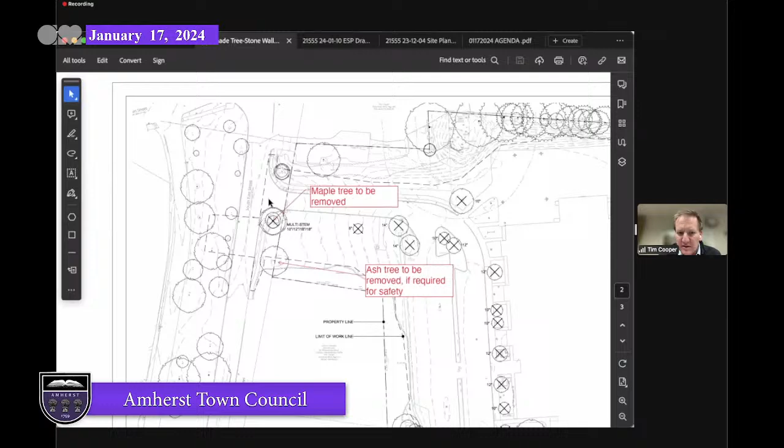We are going to zoom in around this exit with the two trees that are just to the south of the exit, south of the Main Street, South East Street intersection. So the intersection would be just where my cursor is, and this is the egress from the school. I can zoom out a little bit for context.

So the maple in question is just south of the existing drive, and then the ash is at the corner of the site. As part of the overall main project, this drive will be converted to an entrance and egress for staff and parent vehicles, with 3 lanes. It will be widened and moved to the south, away from the intersection at Main and Southeast Street.

That movement will move it into this maple tree. That movement is basically to mitigate the traffic concerns with the queue at that intersection, so we would like to move that entrance down to give a little more space. That is why that tree is slated to be removed with the current design.

The proximity to the ash tree, and the condition of the ash tree and sight lines, which we have to get out there and look at, may require that that ash tree be removed too. But that is why we have made the application for both of those trees to be potentially removed. The maple tree with the current design definitely has to be removed.

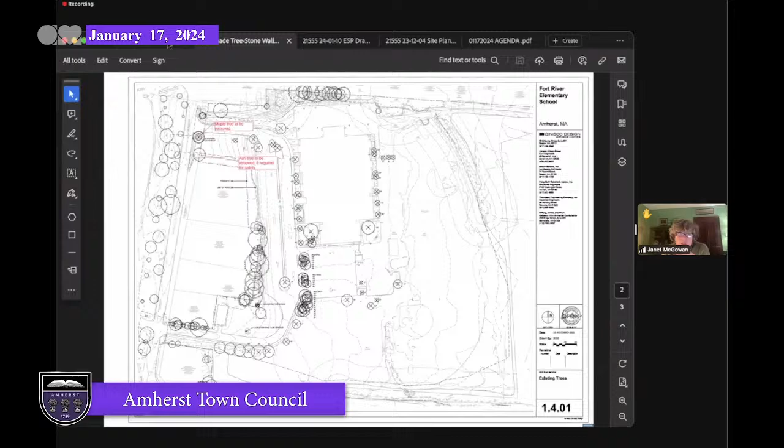So I went and looked at the trees. The maple is clearly, if you widen that exit or entrance in any way, definitely the maple tree would come out. It wasn't clear to me from the map the location of the other tree. I didn't know where that tree was vis-a-vis the new road. So I wondered if it could be saved, but I didn't have any maps to say.

Excuse me with this cat, I'm sorry. So I wasn't sure it had to be removed because I wasn't really sure where the road was going to be. I couldn't find a map that really showed that clearly. I just had two small maps in my packet.

Okay, all right. And it sounds like Mr. Cooper isn't even sure that the ash will be affected or not at the moment.

If I may respond to that. So the drive moved to the south, the curb line is right at the canopy edge. So depending on the health of the tree, it could very well survive. But for the sake of safety, we would absolutely want to make sure that everything was healthy, not obstructing any views, before the decision was made to keep it.

The view on the screen now shows the drive in the final position, which is widened to 3 lanes, so 2 can exit and 1 would come in. And the northernmost lane in the new position would be right in the stem of the existing maple tree. So that's why that would want to go.

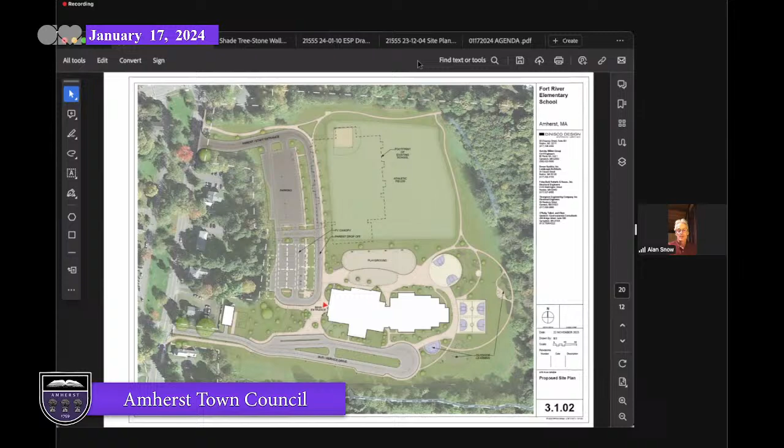Okay, I'd like to follow up on a couple thoughts that came to mind over the tree itself - this is the ash tree. Unless the town wants to put in funding to inject the tree to preserve it from emerald ash borer, it will die eventually. The tree is surrounded by probably half a dozen other large ash trees that are well in decline and dying from emerald ash borer. So it's just a matter of a couple of years before that tree is in decline.

As far as the tree hearing goes, it's a healthy tree now, so we need a tree hearing for it. In 2 more years, I would probably be cutting it down because it's falling apart over the public way. So I did meet with the Public Shade Tree Committee, we did discuss it.

I was told essentially that there are 2 phases to this project: there's the temporary driveway fix, which is going to be all traffic coming in and out of the northernmost exit - so buses and non-school vehicles, parents, etc., pulling into the school. And the southern entrance is going to become the construction entrance. So for a period of probably 2 years, this area is going to be used to get in and out of the school for day-to-day operations.

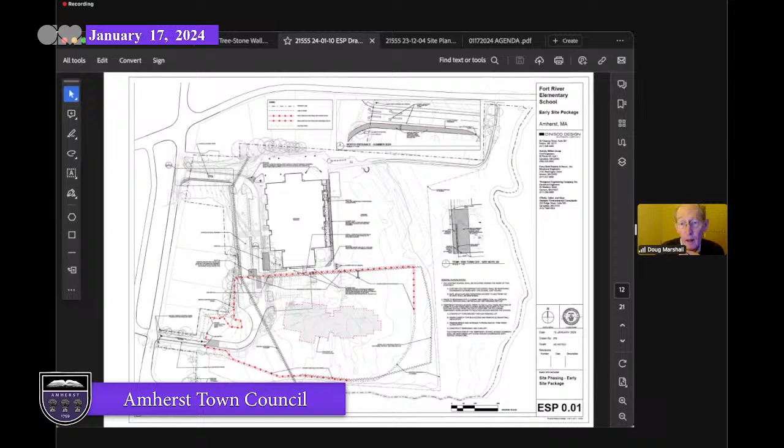Right. And I assume there's not enough frontage on this site to move the driveway entirely past the maple to the south. Is that right? Correct. Okay.

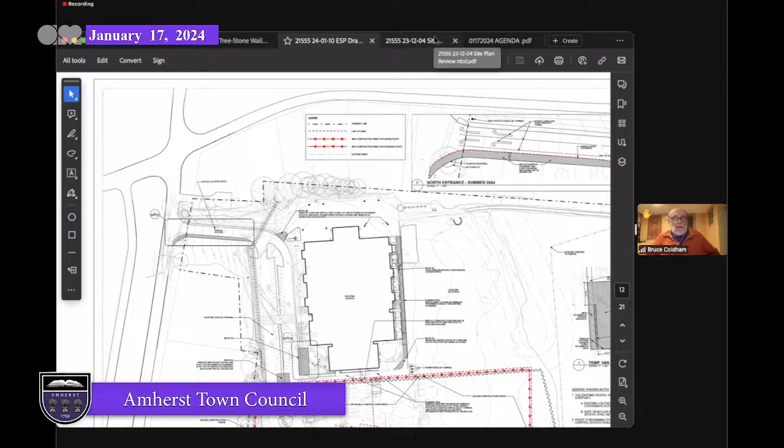For the record, I guess I should say that although I'm not a member of the elementary school building committee, I have attended all but probably 3 or 4 of the meetings they've had in the past 3 years, so I'm rather familiar with the project. I do remember many of the conversations, particularly around site selection, whether we would have the Wildwood site or the Fort River site. One of the principal concerns against the Fort River site was the problems of traffic management in and out of the site. And if Rupert Roy Clark, the maintenance department superintendent of the schools, were here, he would express a very strong concern about trying to mitigate, which is what the design team are doing here.

So it's a serious problem that is trying to be solved here, and it seems the best solution is to move that driveway. I'm representing, I think, not just my own view, but some of the other folks on the other committees who have been chiming in on this. Also my personal opinion, as I saw that tree, it's a multi-stem tree. It may be healthy, but it's not particularly attractive. Under the circumstances, I would strongly support the removal of that tree and planting another one that can grow and eventually look a lot nicer than that multi-stem fellow currently there.

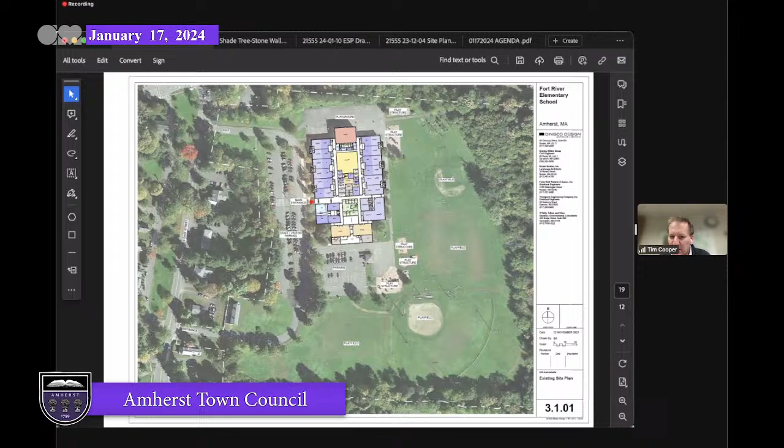There is some compensatory storage, some minor regrading as the floodplain extends onto the site, and we will be manipulating the ground within that, but the building itself is outside of it.

Moving to the proposed site plan, we have separated the vehicle traffic on site in the proposed plan. Parking for staff and parents will all enter and exit through the north entrance, which will be widened to 3 lanes.

For parent drop-off, parents will come in, circulate through the lot, and drop off at the west end of the building. Traffic for that drop-off pattern will be going through the parking lot, but teachers will be in before drop-off and they will be leaving before, so there will not be active parking during that. All of which is to say there will still be staff control of the drop-off situation as there is now.

The southern entrance to the site will be dedicated to buses, service, and vans. They will all loop through down here and be able to discharge students to either the door at the center of the building or the main entrance, depending on how staff wants to bring students into the building.

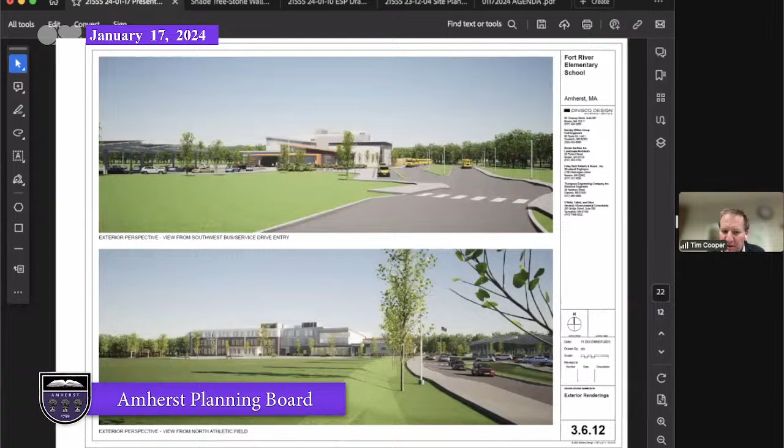The view on the bottom half of the page is looking from the north as you would be leaving in the parent drop-off drive, looking at the building, and you can see the 3-story classroom behind the library and cafeteria.

That is, those are the plans and the views of the building. I don't know how much else you would like to get into, but we have utility plans, we have lighting plans. We can also open up to questions. I don't know how you would like to proceed. That is the overall of the project and the benefits that we see from it.

Okay. Thank you, Tim. I'm sure we'll come up with a few questions for you to show us a little more of the design before we're done. All right, so...

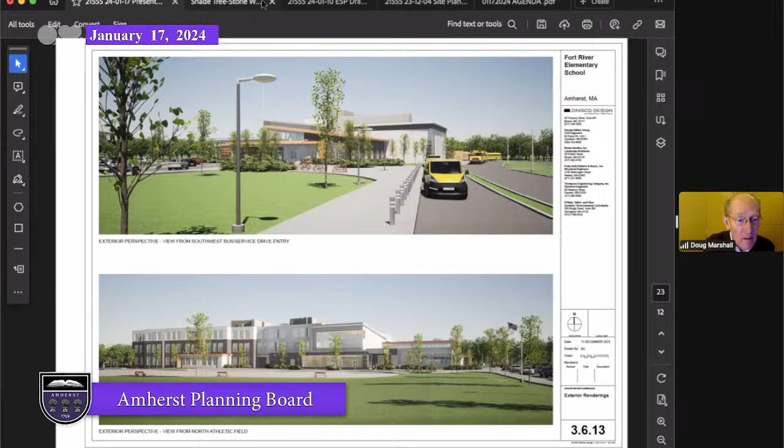I guess you mentioned the solar panels going 15 feet, going into the 30-foot required setback, and I didn't remember hearing that before. Chris, do we have a complete list of the waivers?

That particular item is not a waiver, it's a special permit, and it is mentioned a couple of times. I think one is on page 2 of the development application report, where the side setback is mentioned, and the side setback normally in this district is 15 feet, but because this is an educational use, the setback needs to be 30 feet.

And the setback for the solar canopy that's proposed appears to me to be 5 feet in one location and 10 feet - 5 feet for the canopy and 10 feet for the post. Now, it is possible to have a special permit to modify that setback requirement.

And at the bottom of page 2 is a description of the footnote A special permit that the applicant may choose to take advantage of. So the applicant has a couple of different choices here. The applicant could pull back from the property line 30 feet and then meet the zoning dimensional requirements, or the applicant could apply for a special permit to modify that setback requirement and then choose how much he wants to modify it. And it's kind of a trade-off between having more solar canopy available or less solar canopy available.

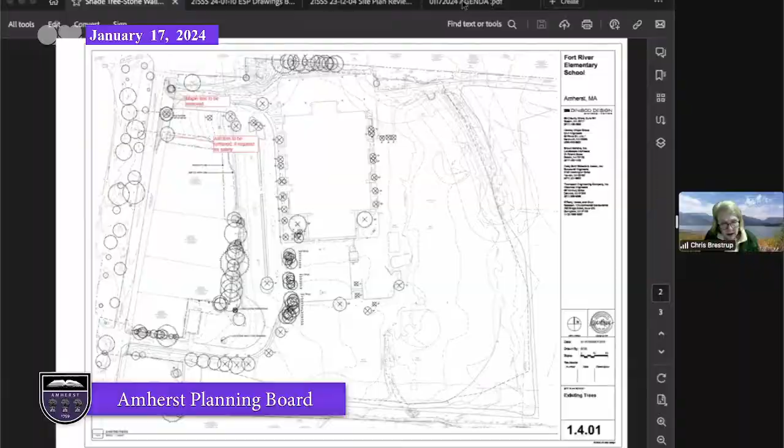But if not, it would probably be sometime in early February that this would be heard by the Zoning Board of Appeals. So I think that is the extent of the special permits, which would be, in the end, three from the planning board: a special permit for the height, a special permit for filling, and a special permit for the side setback for the solar canopy. The one you have not received yet is the side setback for the solar canopy, so Mr. Cooper will be submitting that unless the applicant decides to pull back and not put the solar canopy so close to the property line.

Thank you for running through all that, Chris. That is helpful to hear it.

Janet, I have seen your hand for a while and I'm now ready to call on you. Thank you, Chris. I got a little confused on buildings and structures. Can you say which is the ZBA structure? What structures does the ZBA have to approve? I was writing my notes and I got lost - the school building and the shade structure for the outdoor classroom. Oh, so it's the building itself. Okay, thank you.

It's part of the building. It's only about maybe a quarter to a third of the eastern end of the building that's going to be located in the FPC zoning district, so that's the part that needs the special permit. And then that little outdoor classroom needs a special permit. Okay, thank you. All right.

All right, so I'm going to ask Bruce a question since you've attended most of the school building committee meetings over the last many years. Do you think in the site selection it was understood that all these permits would be required? Bearing in mind that I was not a member of the committee, I just witnessed and so forth, and I probably didn't get all of the packages. But I would guess that at this level of granularity, the answer would be no, in terms of very specifics, because of course we hadn't designed the building then.

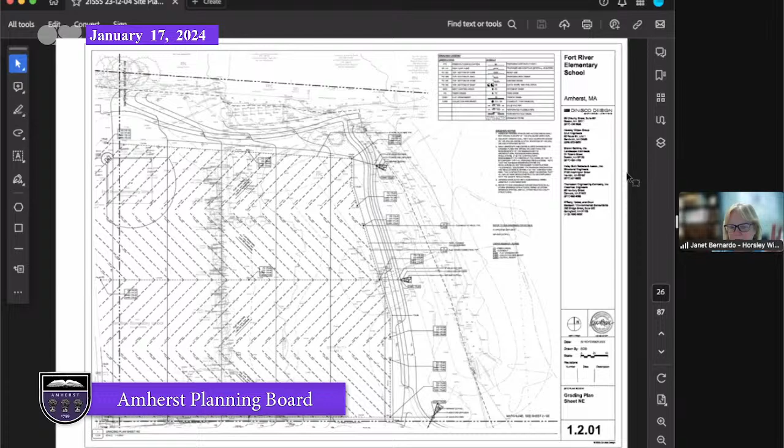Anything to add, Janet? Yeah, I'll just add that, as we mentioned, there is that large twin culvert that crosses through the site, and that became our control. So the final invert needed to hit the top of our pipes at the top of that culvert, so that it would be above the bottom of the culvert. It's a 44 by 27, correct. And so if we have a 12-inch pipe coming in, it's coming in at the top, so it has that separation from the bottom of the culvert. So that was our goal, to keep that culvert as our controlling invert.

Okay, thank you. All right. Any other questions on water at the moment?

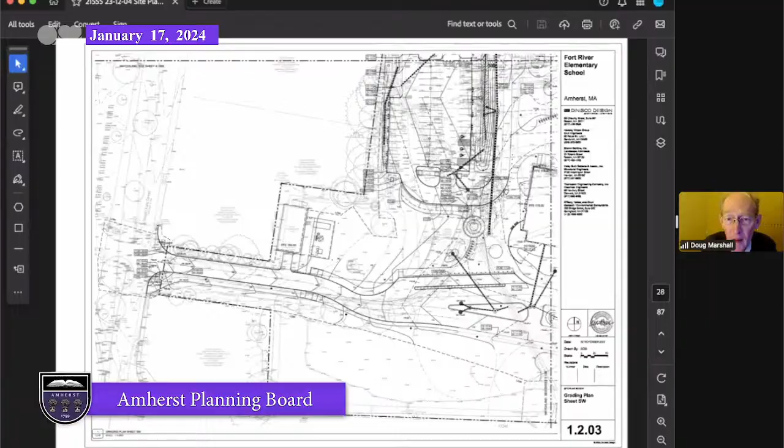Tim, is there somebody from your team that should go through the traffic conversation? We have David Loring here. I will preempt his comments by saying that in discussions with the town, our purview ends at the property line, and off-site traffic stuff has been discussed but is not part of the project. So with that, I'll let David talk about what we've done on site.

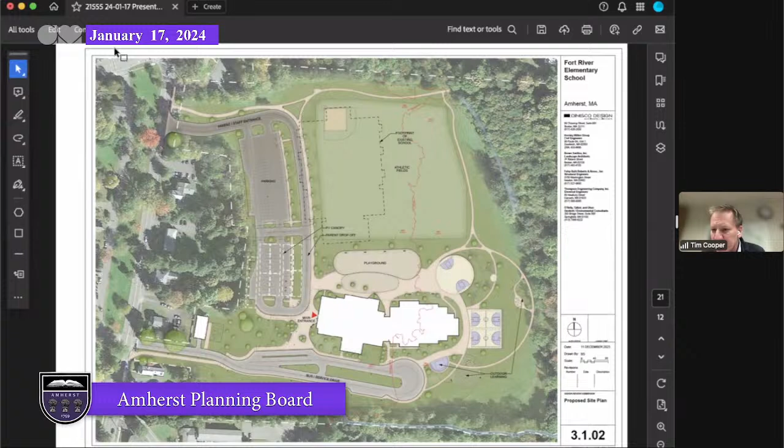Rick, I see your hand. You want to say something before? I wanted to add, not to just leave Tim's statement that our work stopped at the property line, the town has retained a different consultant to look at traffic control measures related to the project off-site, and that report is due to them in February. I got that information from Paul Bockelman through the OPM. Great, thank you.

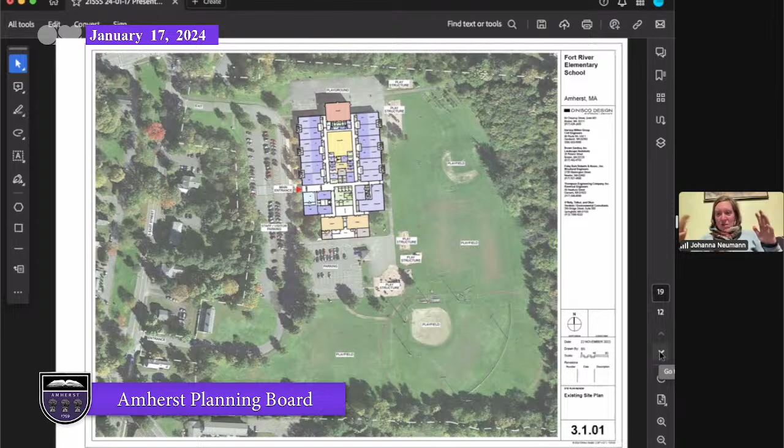And then I kind of, I'll admit it, I kind of hate the fact that the pedestrians and the cyclists are smushed together onto the same infrastructure. In regular society, cyclists are supposed to share the road with the cars, and you're not supposed to ride your bike on the sidewalk. I just think it continues mixed messages in no man's land for cyclists, when that's actually, I think, a problem we have the opportunity to solve. So those are my concerns.

David, do you have any response to any of that?

Most of the site design fell under others, we didn't get involved as much with the bike and pedestrian layout. But I'll make a couple of comments as a traffic engineer looking at it. It's difficult. We want to get the crossing on the bus loop raised. I know we did discuss and consider it. It is a managed entrance, intended to be signed for buses only, so we're talking about buses and that type of vehicle only, which should be intimately aware of the situation and setting they're coming into. You can put a raised crosswalk there, it will add a further traffic calming device, but it's something the buses are going to have to traverse over. So we can go either way with that, I guess. The actual bike and pedestrian layout and walkways were designed by others on the Dinisco team.

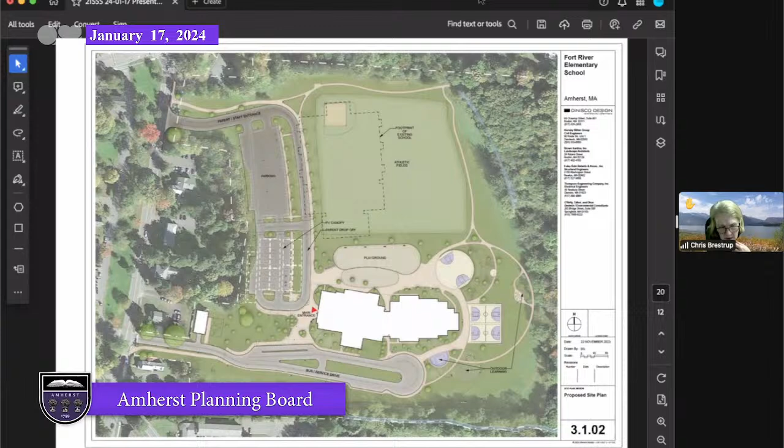So I just wanted to mention that we have a full-size set of drawings here in the office, and it's really good to look at. If anybody wants to come in and look at that set, I'd be happy to spend time with them, because it shows a lot of details that are hard to see on the set you received in your packet. It's also hard to manipulate the computer to see everything because it loads slowly. So feel free to let me know if you want to come in and look at the big set - it may answer a lot of your questions.

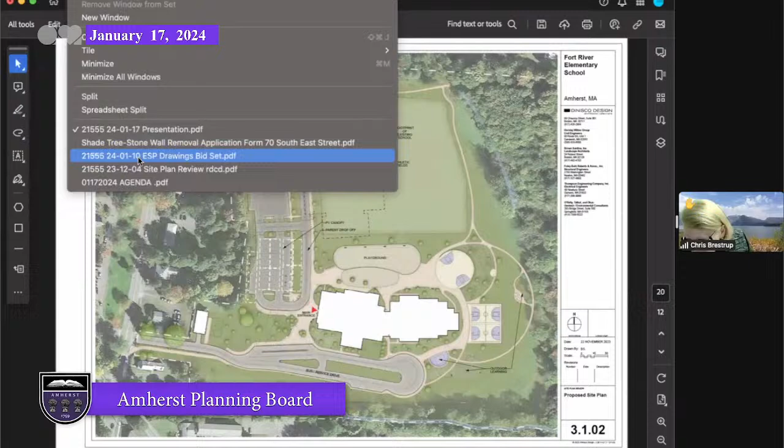And Chris, assuming we don't get through everything tonight, when are you thinking we would continue this hearing, so we have a sense of how long it will be, during which we can think about coming in to look at the set, and it not be too late to bother? I would have to ask Pam for her advice on that. We have upcoming meetings on January 31st, February 7th, and February 21st. The January 31st meeting is going to be about Hickory Ridge, and I expect that's going to take some time, and we'll also probably want to talk about University Drive. But I believe February 7th would be a possibility for continuing this public hearing, and there's also February 21st, as I said.

Okay, do you know if we are on the project's critical path at this point? Is there urgency to us getting through our review? So the early site package, which is clearing the ground south of the construction fence, is already on the street, going out to bid. The contract will be awarded in February. That being said, the design for the final situation, the layout of everything, that project will go out to bid in July. There are certain deadlines we have to meet in terms of MSBA review and other things, but our general position is that the sooner the better. That said, we are happy to work with you on your schedule. Okay.

In terms of the two special permit applications that we know about, the height and the fill, I assume if we were to deny those, that would basically blow up the project. Is that right? That is a fair statement. Okay, no pressure.

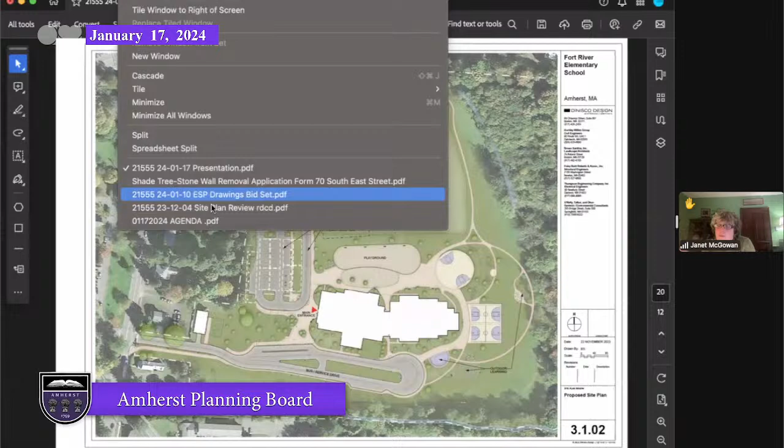Okay, Janet, go ahead. You're muted. That's basically it. I just think plantings and screenings slow and make this parking lot more attractive and safer for people to move through. If you have a kind of little island—like I've stood on those islands waiting for cars to go by—you feel a little better when you're up in the air a little bit. But I just think, let's follow the bylaw and make that a little prettier. I mean, the rest of the site looks really nice, and all of a sudden there's this big asphalt expanse.

I just don't think it's safe, and I don't think it's particularly attractive, and I think you have space to do stuff with it. Can I make a comment relative to the screening? Sure, Bill. When we designed the parking lot, we took great care in not disturbing the buffer between the parking lot and the property line, so the trees currently in that area all remain.

We can look at it, but I think it's going to be hard for us to put an evergreen screen in without disturbing the existing trees. That's why we didn't show any screening in that area, because we preserved what was there. But we certainly can take a look to see if we can add some screening without disturbing the existing vegetation.

No, I think it's a great idea, and I'll go back and look myself because I'm not sure what it looks like in the winter. I mean, I think there are evergreens in there. There are some, yes.

There's a real separation between those houses and the school, and I think that's a nice thing to preserve. There's also a berm - this is the first time I've been here when there weren't leaves on the trees for the southern two-thirds of the lot. One acceptable way to mitigate in the code is a berm at least 3 feet high to block headlights, and that exists from the south end of the parking lot to at least the middle, and probably a little further north. I'll have to look at that again.

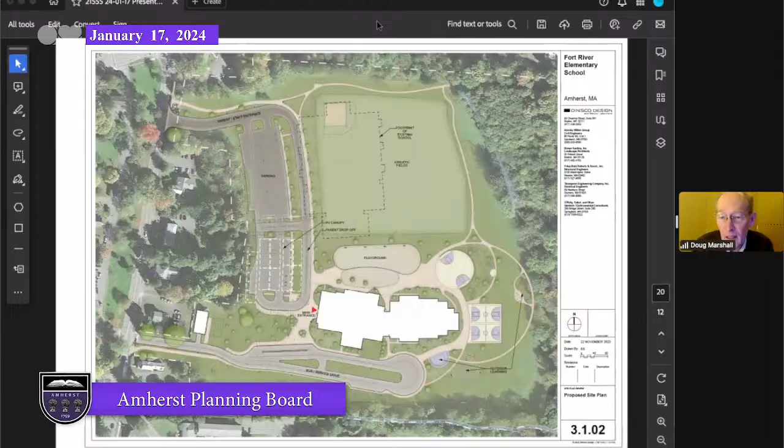Bruce, actually Rick, you had your hand up first. Okay, Bruce? I was simply going to move continuation - if Pam has the answer, I think it was February 7th. Move continuation of the public hearing to February 7th at 6:45, I suppose. I think that's all that's necessary. Chris, does 6:45 work for you? Should we make it a little sooner so we don't have to wait until the clock hits 6:45? I think we usually schedule public hearings for 6:35, and we may not get to them right away, so we'd get to them sooner than 6:45. I'd say 6:35 is a good time. 6:35 is fine, okay, so I'm happy to second your motion, Bruce.

Any comments from the board that you need to make tonight, as opposed to in a couple of weeks? Not seeing any.

Alright, why don't we run through a roll call to continue to February 7th at 6:35. Bruce? Aye. Let me get my list. Jesse? Aye. Janet? Aye. Johanna? Aye. I'm an aye as well. The motion passes, 5 in favor, 2 absent.

The time now is 9:19. So thank you, DiNisco, and all your associated consultants - appreciate your work on this. We hope to see many of you again in a few weeks. Thank you very much.